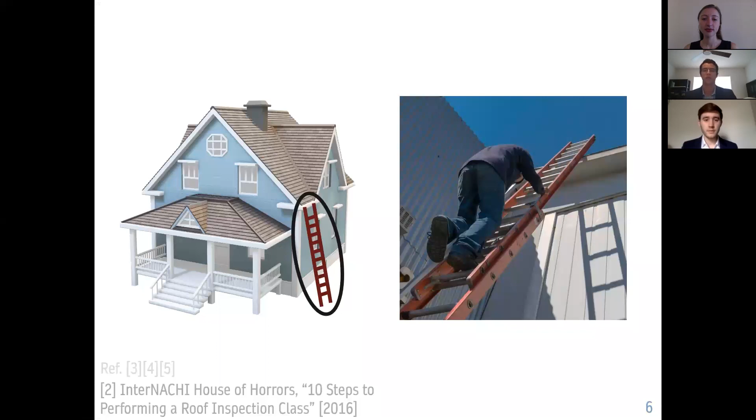Currently, the process for roof inspection begins with the inspector accessing the roof via ladder. While at the top of the ladder, the inspector will lift the edge shingles. This is a vital step that gives them insight into the roof construction, where they can check for the number of shingle layers and weather protection elements.

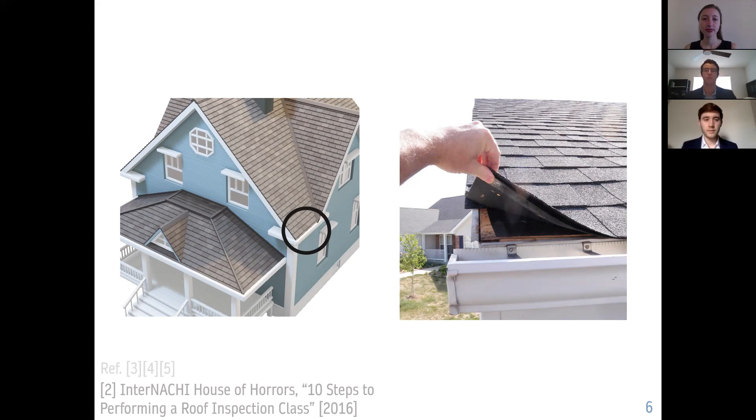The inspector will then get onto the face of the roof. Here, they will be inspecting the 10-foot by 10-foot area with the most causes for concern. And if they find 10 or more problems within this 100 square foot area, it is likely that the roof is in need of some repairs.

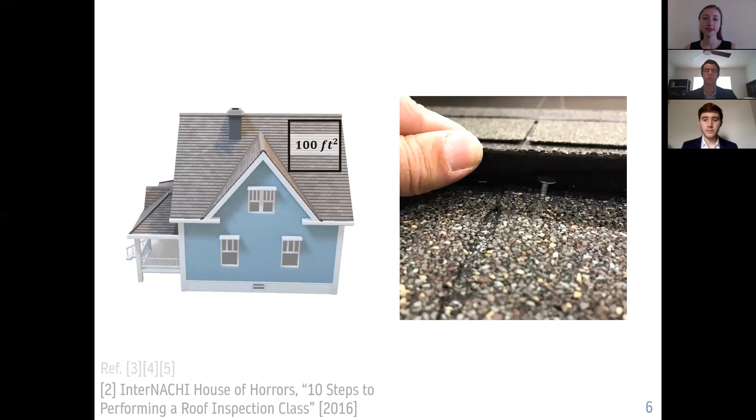Finally, they will inspect areas with increased water damage risk. These areas require metal pieces known as flashing to protect creases around chimneys, vents, or roof interfaces.

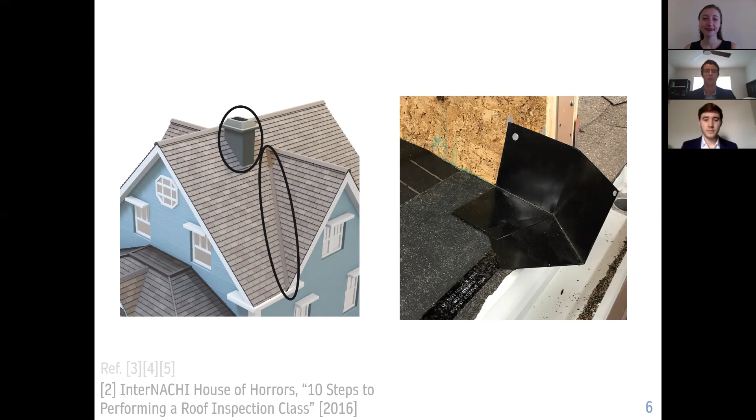This process is quite involved, and it all starts with the inspector getting up on the roof in the first place. But current equipment limits access to particularly tall or steep roofs. A standard ladder height only allows inspectors to access roofs of up to 2 stories high, and while there are ladders that reach up to 60 feet, none of the inspectors that we've spoken to feel safe using ladders of that height.

For particularly steep roofs, boot attachments have been developed that increase grip. However, a majority of inspectors have told our team that these still don't work on roofs above 28 degrees in slope, which is the most common roof slope.

For steeper roofs, inspectors have begun utilizing drones, but they consistently mention the inability of the drone to lift shingles or get high-quality images underneath shingles.

After discussions with roof inspectors, homeowners, and insurance adjusters, we were able to develop 4 key metrics for the ideal solution to meet. The first of which being the ability to inspect roof edges, faces, and flashing areas. The solution also needs to allow inspectors to access roofs above 3 stories and above 28 degrees in slope, ideally achieving all of this while allowing the inspector's feet to remain safely on the ground.

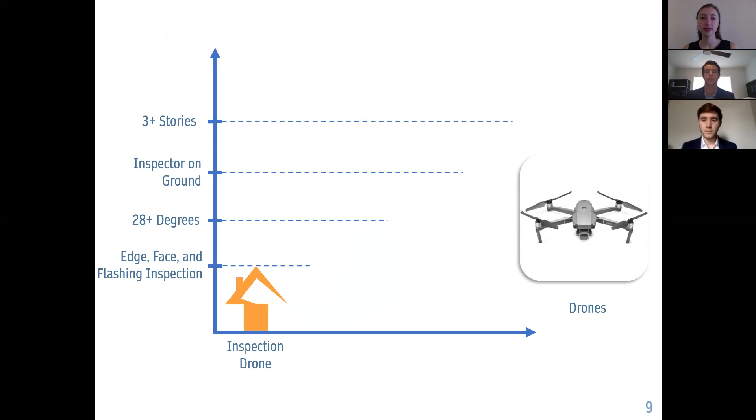Our team first considered developing a drone specialized for roof inspection as opposed to current consumer drones. However, this solution did not allow for an efficient method of lifting edge and face tiles. We then explored developing additional safety equipment for inspectors, but this would not meet our metric of keeping the inspector on the ground. To achieve this, we began exploring robotic solutions.

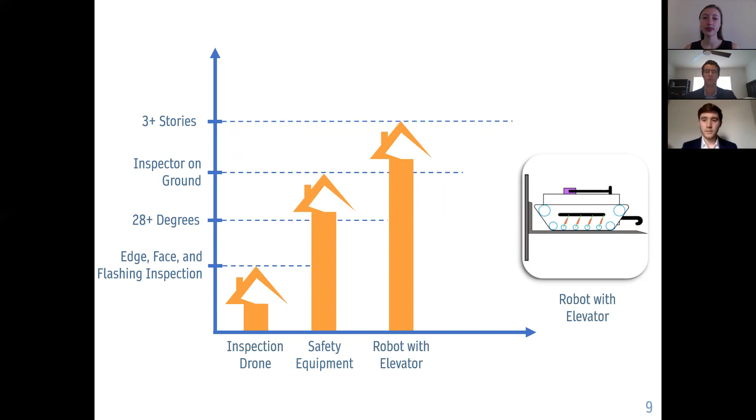A robot delivered to the roof via an elevator would be able to meet our first 3 metrics, but the elevator height would still limit access to tall roofs. We then determined that a robot delivered by a drone would allow access on even the tallest roofs, thus meeting all of our metrics. Our team focused on the robotic component of this solution as we felt it was the most novel.

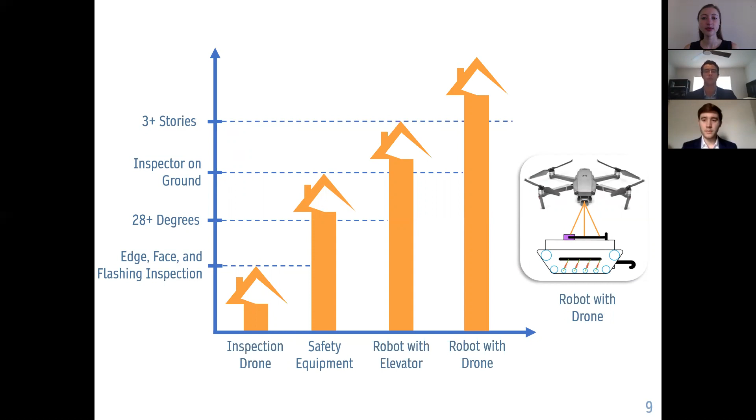This robot took the form of Rex, which is designed to meet all stakeholder needs. Rex can lift and capture images under face and edge tiles on roofs above 2 stories and 28 degrees in slope, all while keeping the inspector safely on the ground.

Now Avery will tell you about how Rex's design is tailored to this functionality.

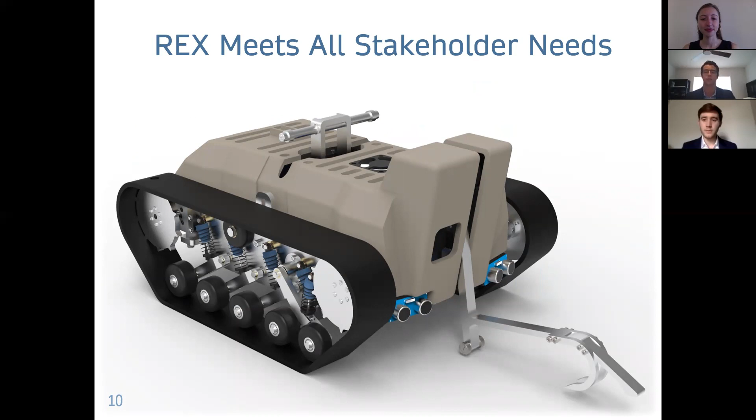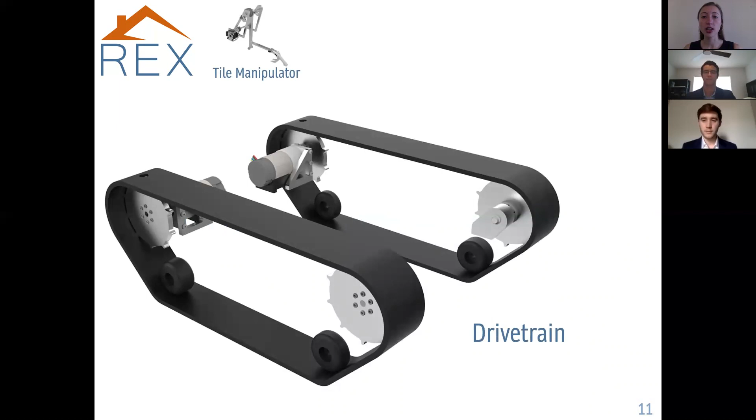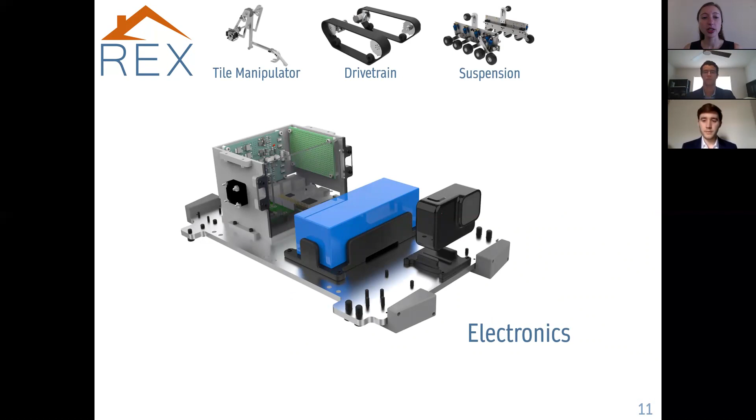Thank you, Caden. Rex is comprised of 4 main subsystems. The tile manipulator, which will lift shingles for close-up inspection. The drivetrain, which includes driving motors, sprockets, and treads for moving Rex around the roof. Suspensions, which help Rex traverse smoothly. And an electronics and software package to allow remote control, support power distribution, and enable sensor capabilities.

When designing Rex, our decisions were driven by slope, weight, and lifespan goals. Our slope goal was to successfully traverse roofs of at least 28-degree incline, as this is the most common roof slope in the United States.

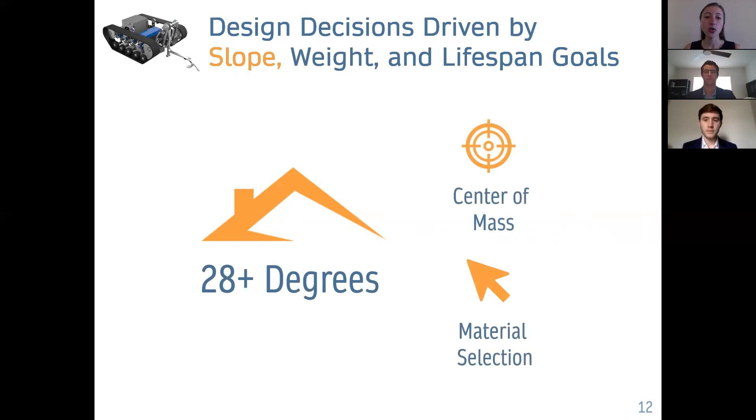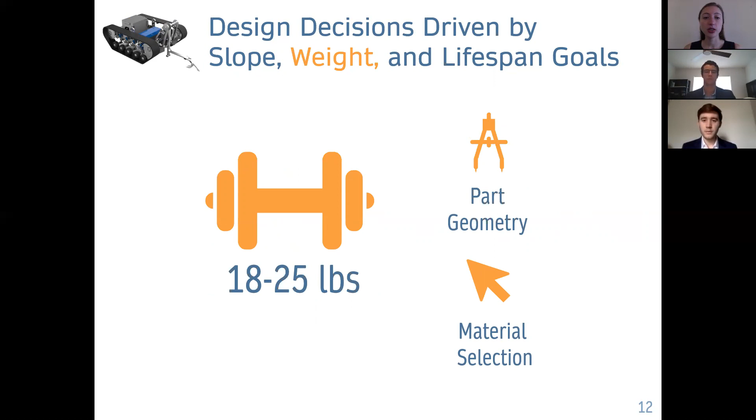We used the location of the center of mass and material choice to design for this goal. Our goal weight was between 18 and 25 pounds to ensure that we would maintain traction on the roof while still being able to be lifted by a heavy lift drone. The design parameters we used to influence weight are part geometry and material selection.

These two parameters also affect lifespan. We aim for REX to have a minimum lifespan of 2 years, which was determined based on stakeholder input and the average lifespan of drones.

Throughout the design process, our decisions were guided by the goals of driving on a 28-degree slope, keeping weight between 18 and 25 pounds, and reaching a lifespan of 2 years. We determined that the tile manipulator system was the most novel subsystem, and so we began our work during first semester with design and analysis of our tile manipulation system.

We considered several designs for lifting shingles, including wedge and hook shapes. From initial tests and force calculations, we settled on this L-shaped hook design, which efficiently leverages the driving force of the robot to lift the shingle. Our initial design was comprised of several components for ease of manufacturing.

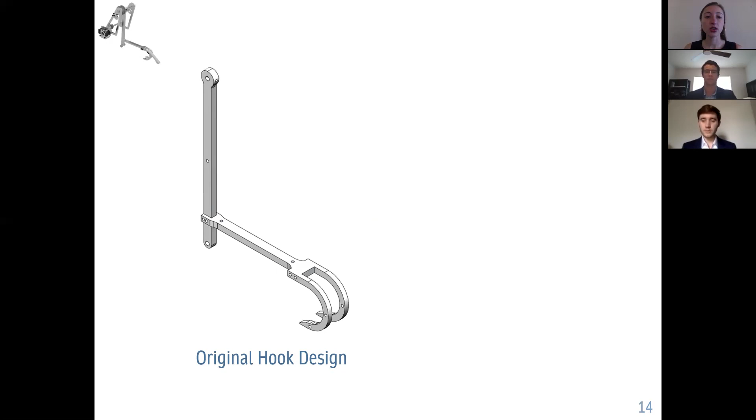After performing fatigue analysis on this initial hook design, we found that the screws at the interface between the vertical and horizontal members failed after a little under 9 months of use, which is less than our goal of a 2-year lifespan for all components.

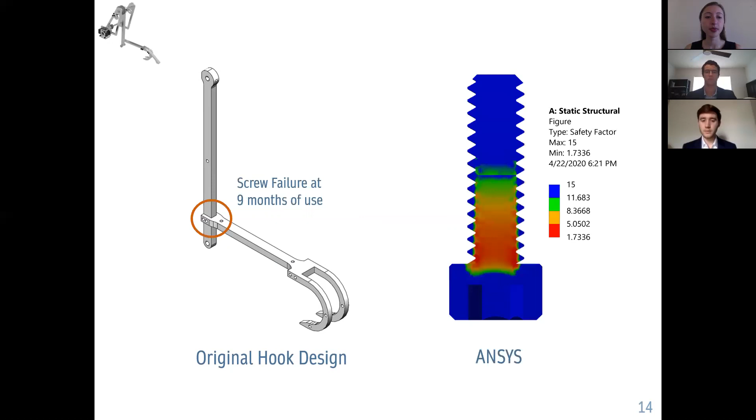As a result, we updated our hook design to combine the vertical and horizontal members into a single piece, which eliminated the need for screws and gave us at least 2 years of use before failure.

The dual-ended hook design distributes the force applied to a shingle and also provides the opportunity to mount a stationary camera onto the hook itself.

Viewing underneath shingles, especially to see fasteners and adhesive, is an important aspect of roof inspection. Some initial tests showed that a hook-mounted camera would provide a sufficient view.

From there, we designed the stationary camera mount shown here on the left. The image on the right shows validation of this camera design, where a trained inspector can see the nails well enough to tell that the nail on the right has been improperly installed.

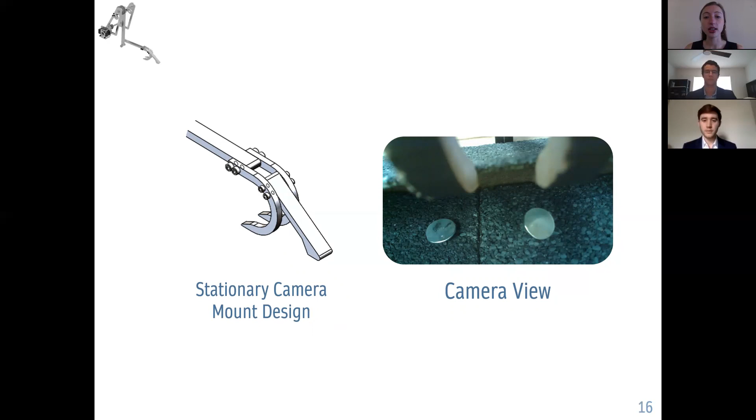Our full tile manipulation system includes a servo motor and pulley to move the hook, along with a secure mount for both hook and motor. Next, we moved on to designing the remaining subsystems.

We began drivetrain design by conducting a system analysis, which informed our motor selection. This graph shows the maximum roof slope we can drive on for different coefficients of friction, based on how the tractive effort and tractive capacity of our robot varies with the increasing roof slope.

From research and testing, we expect the coefficient of friction, mu, between rubber and asphalt to be between 0.6 and 0.8. The black line on this graph represents the tractive effort, which is the required force for our robot to move. The blue and orange lines represent tractive capacity for our minimum and maximum friction coefficients respectively. Tractive capacity is the maximum traction we can achieve before slipping.

Therefore, the intersection of the black line with the blue and orange lines represents the slipping point. We can see that for mu equals 0.6, we slip at 25 degrees, and at mu equals 0.8, we slip at 33 degrees.

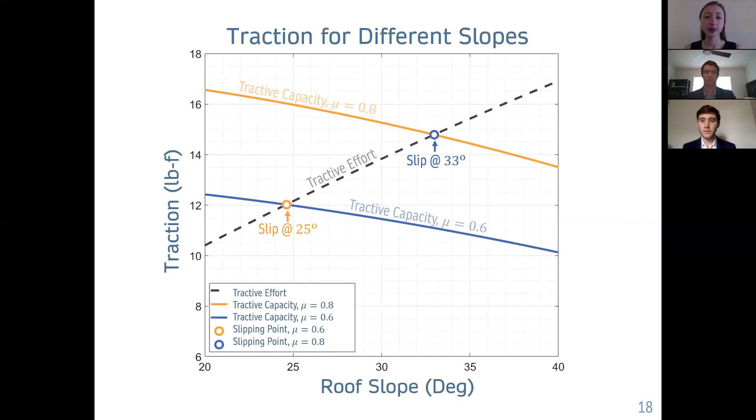From there, we calculated the relationship between roof slope and motor torque required for driving. We found that the necessary torque for 25 degrees was 145 ounce-inches, and for 33 degrees was 178 ounce-inches. However, we know that the steepest continuous sloped roofs are around 45 degrees. So we aimed to source a motor capable of exerting torque of 220 ounce-inches to provide the possibility for REX to drive on steeper slopes with further developments in tread material.

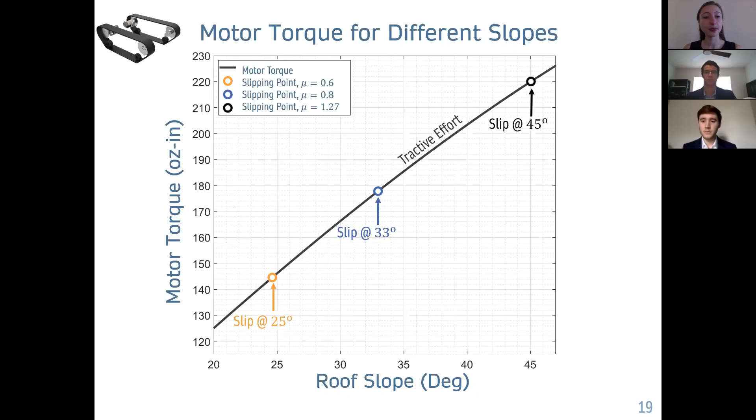Next, we designed our suspension system. Our main goal for the suspensions was to increase the number of loaded contact points to maintain near uniform grip on the roof. The suspension system also helps stabilize REX and enables REX to smoothly drive over debris, peaks, and valleys. The suspension system is modeled after a Christie suspension, as this design is compact and is highly articulated.

The suspensions are designed to have 0.5 inches of vertical travel and include a combination of custom-made parts with off-the-shelf shock absorbers.

Throughout the design process, we needed to ensure that each load-bearing component could withstand repeated use for our 2-year lifespan goal. To do so, we would design the component, solve for the reaction forces it would experience, simulate this loading on ANSYS, and calculate its lifespan and safety factor. If the lifespan was greater than our 2-year goal, the component would be finalized and prepared for manufacturing. Through this process, we ensured all of our parts satisfy the 2-year lifespan, including custom parts like the chassis mounting plate, and off-the-shelf components such as screws and fasteners.

Next, James will discuss our electronics and software subsystem.

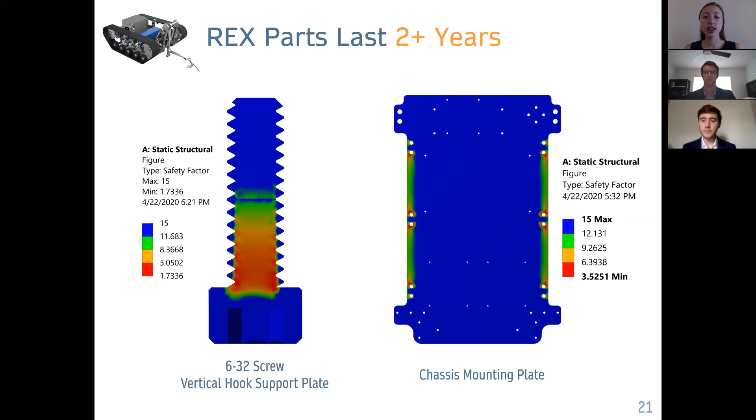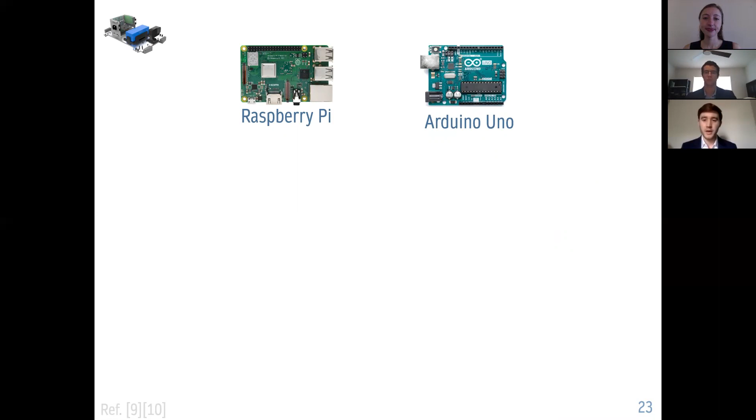Thanks, Avery. Our robot requires an electronics package to control our motors, run the user interface, communicate with our controller, and get sensor feedback. This package is run by our 2 microcontrollers. A Raspberry Pi was selected based on its image storage, live streaming, and mapping capabilities. We also utilize an Arduino to run our sensing package because of its analog to digital conversion capabilities.

The Raspberry Pi is used to drive our robot's motors and receive motor encoder data, ensuring our motors spin at the proper speed. It also handles our UI, including live streaming of video and storage of images.

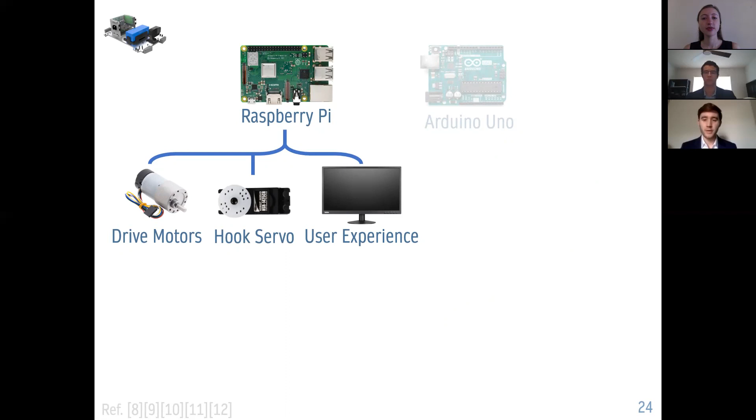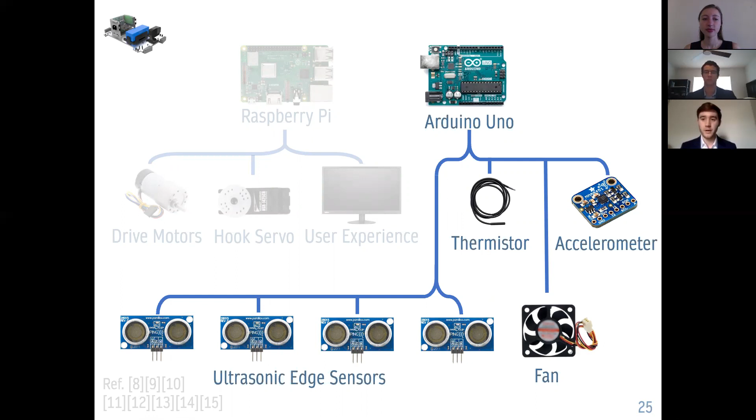As mentioned, the Arduino runs our sensing package. An accelerometer performs position tracking and slope calculation. Ultrasonic sensors are used to sense edges in order to avoid falling off a roof. A temperature sensor in conjunction with a fan helps ensure our battery does not exceed its max rated temperature of 130 degrees Fahrenheit. In order to power our robot, we chose a lithium polymer LiPo battery, which would allow us to meet our weight constraints and lifespan of 2 years.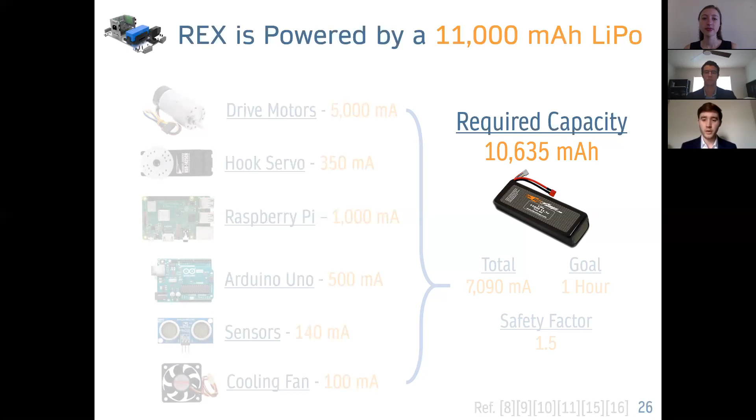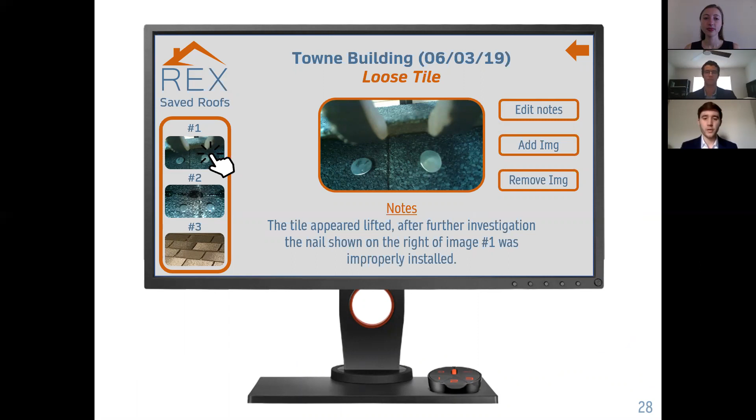While developing the electronics package, software was implemented to run the basic controls of our robot. This implementation has allowed us to validate our electronic packaging and user interface on an ongoing basis, as shown.

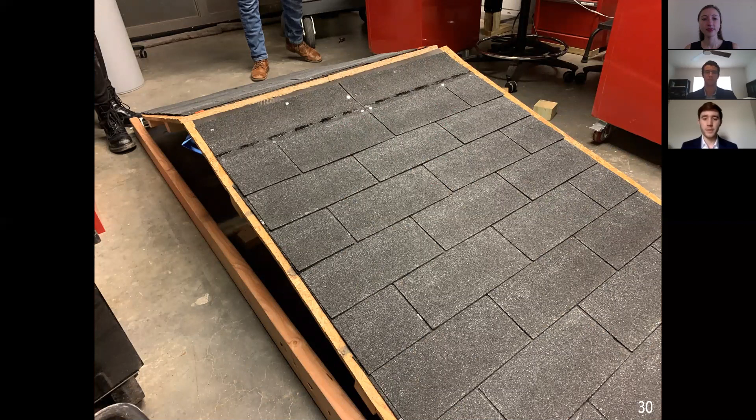For validation, we constructed a 4-foot by 8-foot mock roof with real shingles and adjustable pitch. Our mock roof was to become the primary validation tool for REX until meeting to validate the robot in person became infeasible. Our intention was to drive the robot on the roof at different pitches and confirm it could properly inspect the roof shingles.

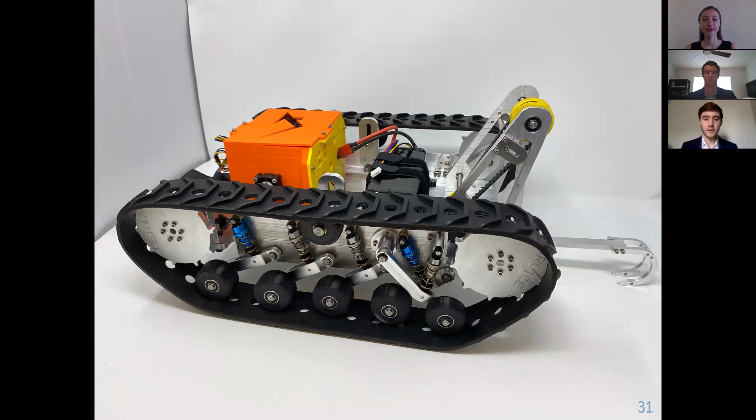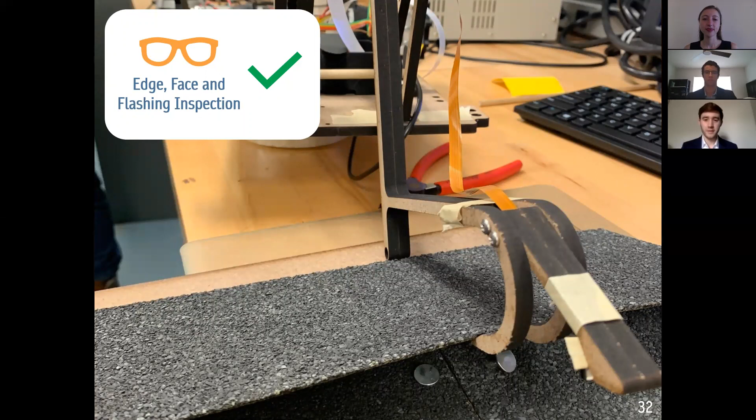Despite difficulties caused by the coronavirus outbreak, we were still able to complete an initial assembly of a robot designed to meet the core needs of our stakeholders and validate some of these capabilities. Our robot is capable of inspecting edge tiles, face tiles, and flashing. We successfully validated that the hook subsystem physically manipulates these roof components, which can be viewed on the inspector's user interface thanks to the camera mounted on the hook.

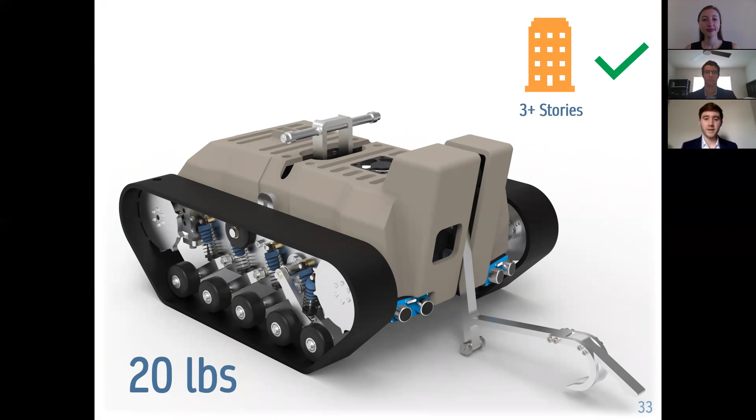REX weighs less than the maximum 25 pounds a heavy lifting drone can carry in the air. This ensures the robot can be delivered to roofs above 3 stories, meeting the second stakeholder need. Our calculations indicate REX can drive on and inspect roofs with a slope of up to 20 degrees, though we were not able to empirically validate this metric. Further improvements to our tread design would enable our robot to inspect steeper slopes.

With all of REX's capabilities, inspectors will be able to inspect previously inaccessible roofs while keeping their feet safely on the ground. Our project would not be possible without the help of many individuals.